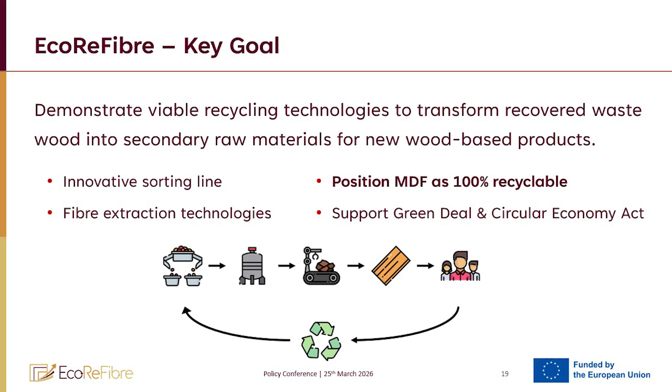But doing that, of course, we had some other goals. We had to address sorting problems, fiber extraction technologies, and of course to support the Green Deal. So EcoReFibre is a project that works along the value chain, so addresses all different issues along the value chain. So this is the main thing, and it's not easy to do, actually.

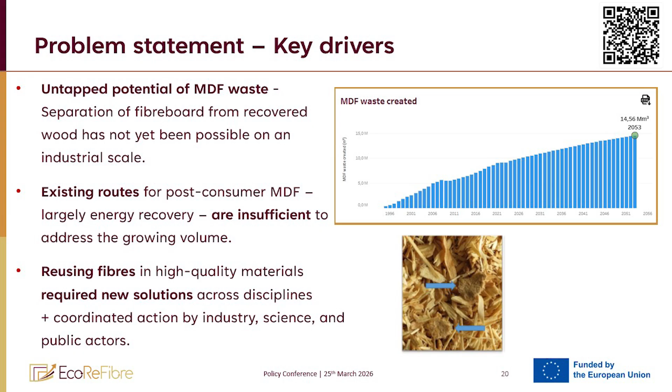When we started working in this project, what we knew at that time was the fact that the MDF waste, the fiberboard waste, increases. And this is an exponential increase. So, meaning that there is more waste. The single user of wood waste at the moment is only the particle board industry.

Okay. But when waste fiberboards come, there you can see this picture, the MDF chips are not similar to the other wood chips or particle board chips. That needs more glue, so to say, making more expensive all the particle board process, meaning that the particle board companies cannot accept more than 5%, let's say, fiberboards in the wood waste mix. Meaning we had to do something about that, not putting in risk the recycling of wood products.

And of course, in order to do that, you need to have more solutions, so not a single solution. So we went to get fibers back to MDF, but also to other sustainable wood products. Okay, and then in order to do that, you need actors along, as I said, the value chain, industry, university, associations, and other actors.

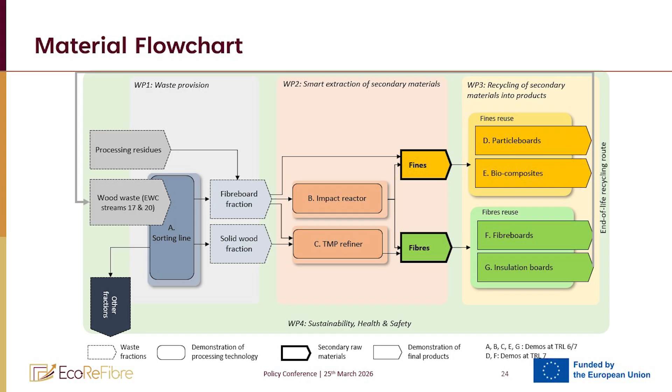The way we worked, 3 work packages mainly with all technical activities, and in the first we worked with waste MDF provision, working with the sorting line. And the idea there was to separate clear fractions as much as possible, fiberboard fraction and solid wood fraction. So this is something important in the project also to remember.

Extraction technologies, creating secondary materials, and then the secondary materials are used in sustainable bio-based products, mainly back into MDF, but also in insulation, biocomposites, particle boards, and so forth, what I'm going to tell.

So the first block of work and the main outcome here was that the project has created a model in order to predict future volumes of MDF waste. It's available on the EcoReFibre website, and everyone can play with it. So if you visit the site, you can play with the model. It is an open access model.

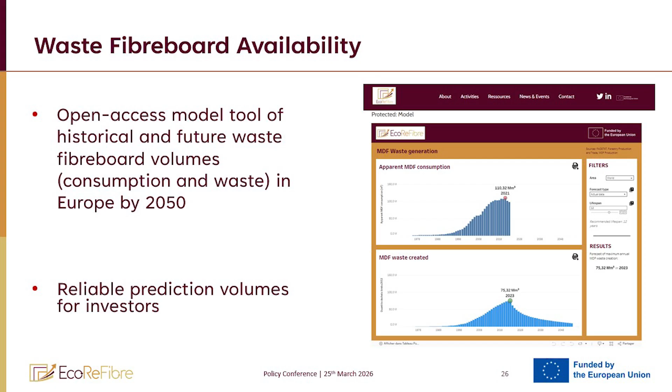Why is this important? One example, it can give information to investors in recycling equipment and so forth, what is the actual material to work with. So for any business, you need to know where and what type of material and what are the quantities that you expect in order to use.

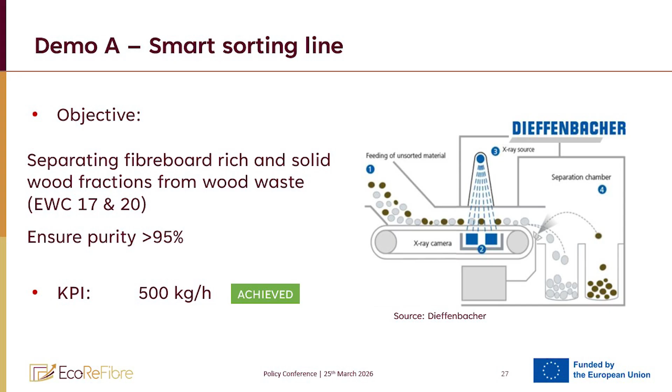Another innovation in the project, we call them demos, because all of them are industrial demos. The first one was a sorting line. We call it SMART because it integrated different technologies, deep learning, AI, and so forth, with the aim to have pure fractions of solid wood and fiberboard waste, meaning that the remaining waste is clean waste, so to say, for the particle board industry.

So we have solid wood, fiberboard waste, and then the rest that can be used by the particle board industry, which is a high-level wood waste then. That was a very big work. It has been demonstrated. We used a facility in Berlin.

The KPI was to have sorting of materials with half a ton within 1 hour. And for the needs of the project, Dieffenbacher has sorted around 100 tons, something like that. So incredible number. And yes, that was amazing work, I must say.

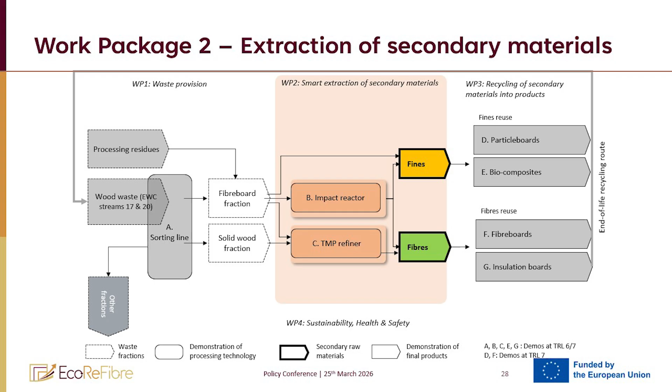When those fractions became available, then we engaged with smart extraction of secondary materials, basically with the so-called impact reactor and with the classic TMP method, the thermomechanical pulping method, to get fines or fibers. Details here, the two different technologies. The impact reactor, at some point we call it extraction, dry or wet, in order to get fines

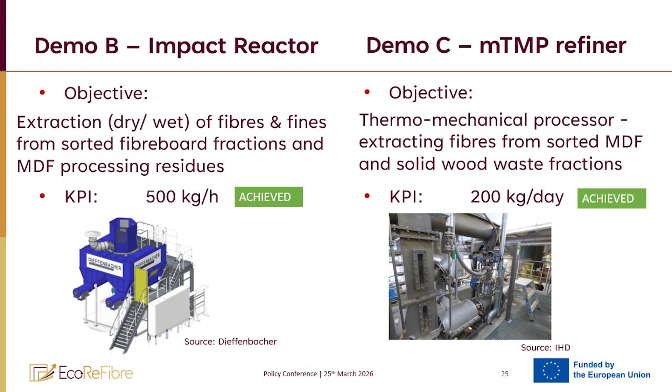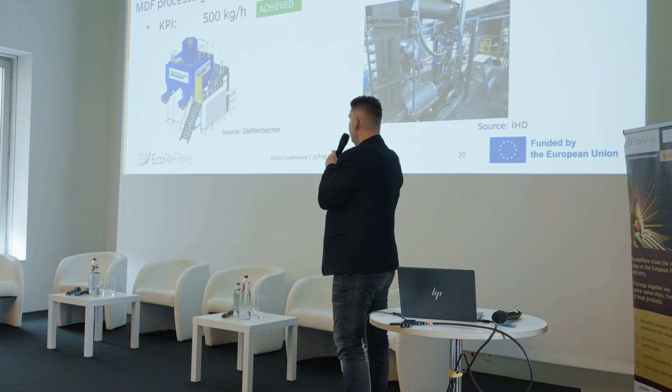or fibers. So with this technology, we showed that it is possible to get high-level secondary fibers from both fiberboard waste, but also from MDF industrial processing waste. The KPI was half a ton per hour, and that has been achieved. And as far as I know, this technology becomes commercially available, which is big news. And I know very few projects that before their end have something on the market or so close to the market.

The second technology, which is very interesting for the industry also, is the classic TMP method, which had to be adjusted for the fractions. So a lot of work has been done by IHD on that. And also they're working on modified TMP processes. And they work with sorted MDF and sorted solid wood. And the KPI has been achieved with 200 kilos a day in the pilot refiner of IHD.

So this is the main engine in the project, providing secondary materials of high level that we have analyzed in terms of particle size distributions, chemical properties, residual resin, and so forth. And the technologies have been optimized also with AI and machine learning techniques.

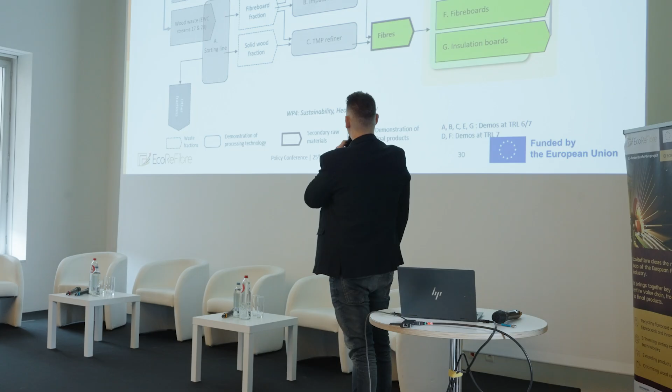Very important to remember. Secondary materials are in two categories, but in reality there are many subcategories coming. Fibers, for example, from the TMP, from solid wood, from processing waste, depending on what raw material has been used and what type of technology we have used. So all those secondary materials have been characterized and investigated in different value chains, as we can see here.

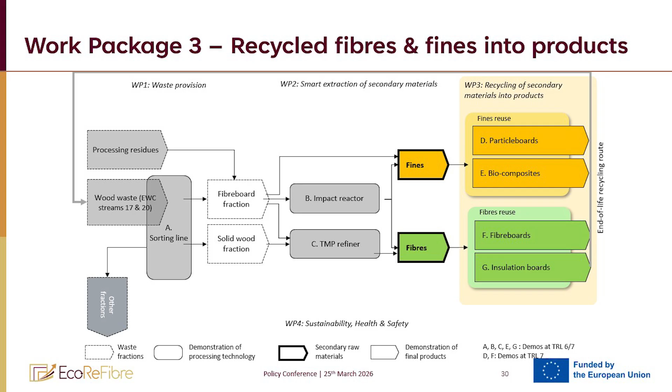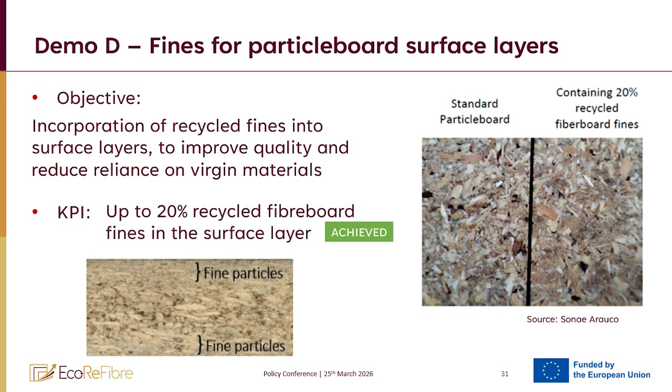We call them demos. The first demo is the use of fines, the fibers that are not possible to use back in MDF, in surface layers of particleboards. This has been done by Sonae, and they proved that up to 20% of fines can be used in the surface layers. And the properties of the boards were as good as all the standard boards that they're making. So that was, for those who know, at TRL 7.

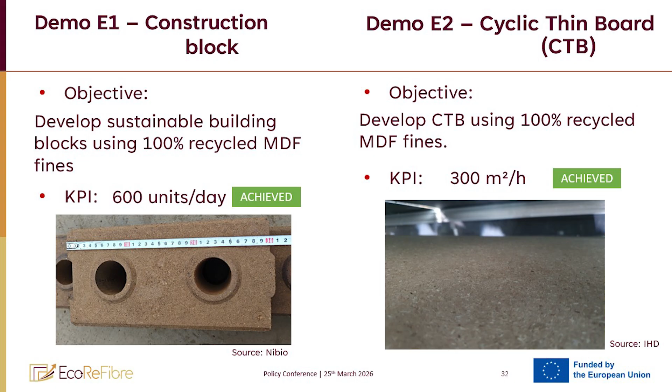EcoReFibre delivered new biocomposites. They do not exist in the market today. NIBIO and Smart Panel have realized construction blocks, building blocks, with fiberboard fines, with a capacity of 600 blocks per day, bonded with a patented technology based on citric acid, if I remember correctly, making those types of building blocks, which is something that does not exist today.

Another biocomposite, we call it cyclic thin board, was realized by Homanit and Dieffenbacher with a capacity of 300 square meters per hour, and that uses 100% MDF fines. It can also use furniture wood waste fines, but we have shown that it is possible to make this new product. And for furniture applications, it might be something nice to have.

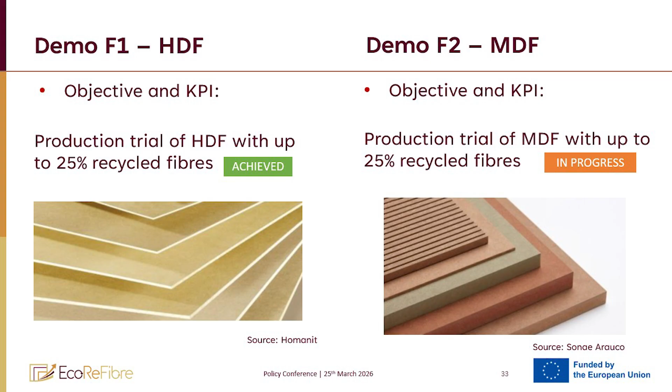The most important demos, industrial demos in the project, have been securing the goal that we had in the project, to make sure that 25% of secondary fibers get back to MDF. For those, again, who know, fiberboards are classified into medium density fiberboards and high density fiberboards. Homanit has realized an industrial demo at TRL 7 with HDF by using secondary fibers. The other demo will soon be realized by Sonae, and this is an MDF demo.

With existing technologies and with existing production lines and minimum alterations to the production lines, it is possible to use 25% secondary fibers.

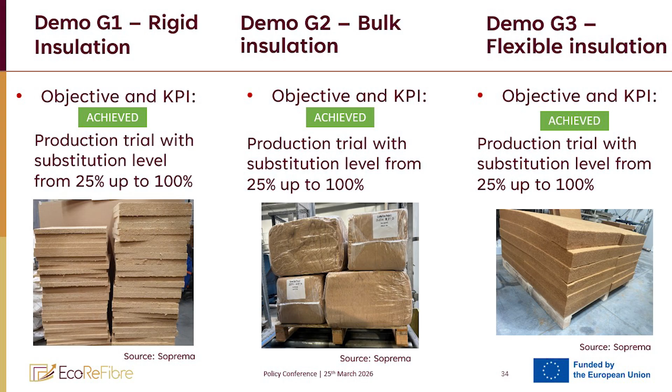Finally, demos at TRL 6 and 7 have been realized for insulation boards, and there are different types. Soprema in France and Cormatex in Italy have realized those demos, and they have used fibers from the different technologies in bulk insulation, flexible insulation, and rigid insulation, as we call them. In all cases, trials have been realized starting with 25% replacement of virgin fibers up to 100%. So it is possible to make insulation with 100% secondary fibers from post-consumer MDF. So quite a lot of work over there.

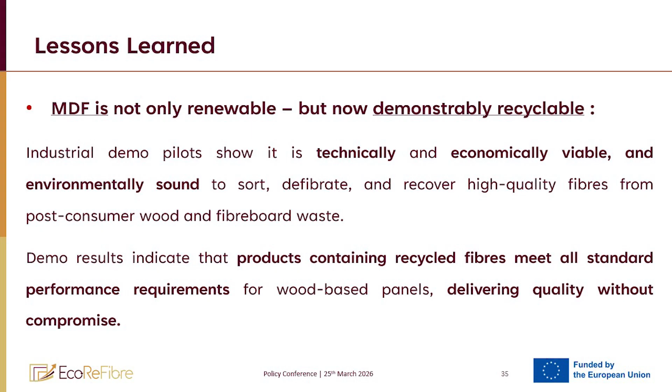We have learned a lot of things in this project, and we are continuing improving on that. So we have shown in EcoReFibre that MDF is not only a renewable material, but it is fully recyclable. So all the technologies show that from a technical, economic and sustainability point of view, it is possible to recycle MDF.

I must say that other companies have been working at the same time as EcoReFibre. They have developed other technologies. Some of them are in the market, which is good, meaning that the MDF recycling issue was high on the agenda. And this is very good. So competing different technologies, and EcoReFibre has shown some of them. And I must say that the final products have been tested for their qualities according to standards that the industry is using. So very good news.

In my opinion, we need to develop sorting systems, and I think that the panel after this will also discuss that, to really make sure that fiberboard waste material will become available, collected in the right way, sorted in the right way, so this valuable material can become available for all the different nice value chains that we have shown. I think that is one important thing, and maybe another flagship project or something like that. And it is important to align with different policies in order to support the work in the coming years. So EcoReFibre has opened the way, and others have followed, and we are ready to continue working in that area.